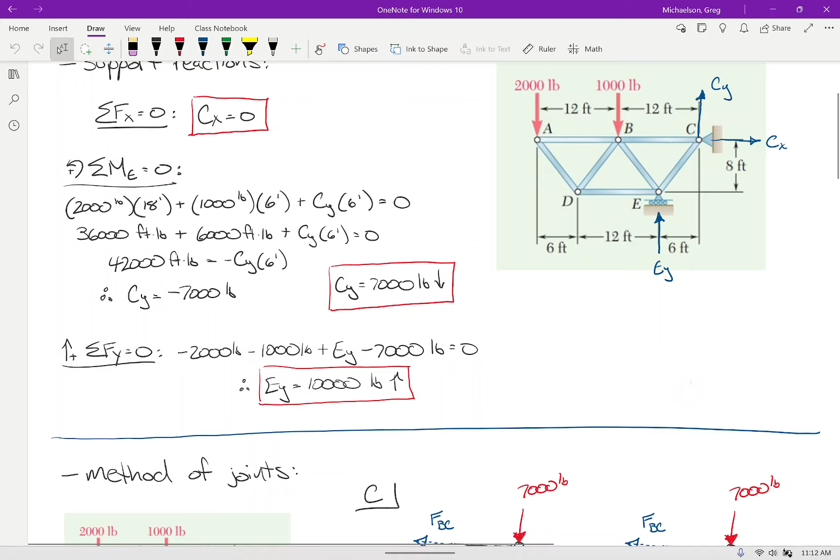Sorry. Oh, the CX is 0. Because if you look at the original structure, there are no forces going this way. The only forces are vertical, right?

So here's what I propose. There's an unknown here, an unknown here, and an unknown here, as there would be in any structure. But if I look at the known quantities, all I've got is vertical and vertical. So if you were to write the equation, just think about it: summing forces in the x direction and writing every force to the right as positive, the only force I have is that. So it's got to be 0. That's what I'm saying there. Does that make sense? Okay.

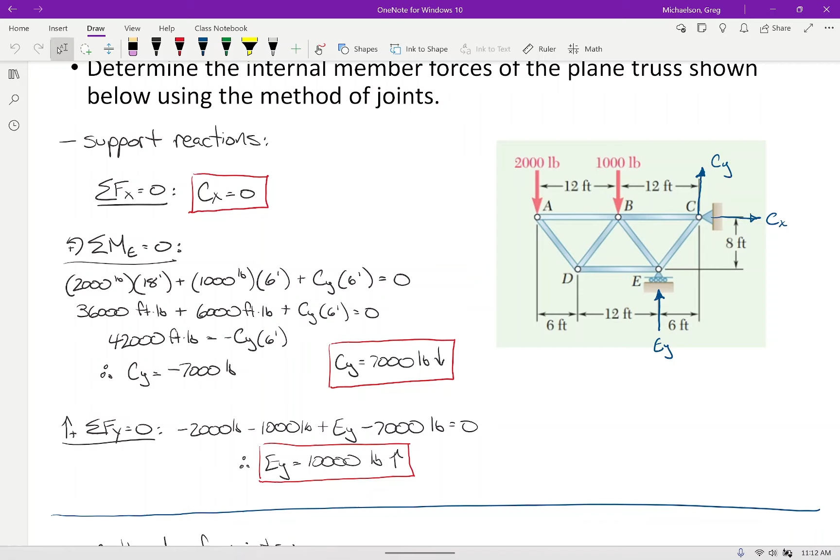All right, let's go through this joint analysis. Let's see if anybody has any question about the reactions. Okay, so let's go through this joint analysis.

Okay, so the first thing I want to ask is does everybody understand why I started this example with joint C? In other words, could I have started with joint E?

Okay, remember that whenever you do a joint analysis, you must start with a member that has no more than 2 unknowns. So if I start the problem at joint E, I have 3 unknowns, 1 unknown for every member. I can't start at E. I'm not saying I can't analyze E at some point, I just can't start with it.

So there are only 2 joints I can start with, C and what? A, right? Would you like to do A off to the side? Just because, we can just do A. Let's just do it on the fly just to make sure we're familiar with it.

Okay, so I'll do it here on the board. So here's how it works. So here's joint A. The first thing I'll do is I'll put the joint here and I'll put all the members framing into that joint. So there's only 2 members framing into joint A. Okay? So far so good?

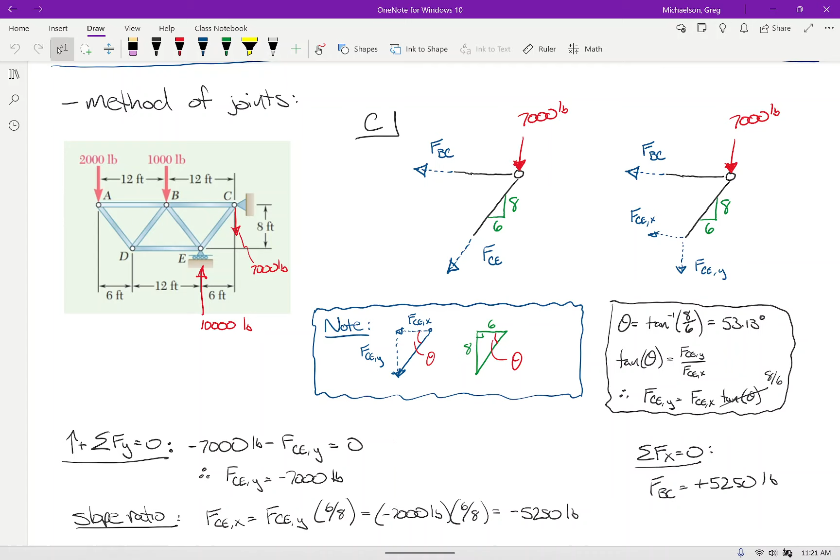Just do it for the rest of the structure, right? So I started here. I did joint C first, then I did joint A, and here's joint A, so I did it the same way here, right? Then I said, okay, if I look at joint D, it has 3 members framing into it, but I knew one of them going in. So then do joint D, then do joint E, and then the very last joint you ended up having to do, because if you follow all your forces, you already knew what they all were. Does that make sense?

So for AB, when you're finding it, so it's 1,500 pounds in tension? Yes. Okay, and so let me guess, is the question why did the arrow flip? Yeah. What's your question? Okay, I thought when they were facing each other, that's compression.

They are. What I'm saying is, here's the joint. The force is pulling away from the joint. If you're the joint and I'm pulling 1,500 pounds this way, that's tension. So the force is going away from A. These two forces are going towards A, so that's compression. So, but for AB, this is AB, right? Yeah. Yeah. Okay.

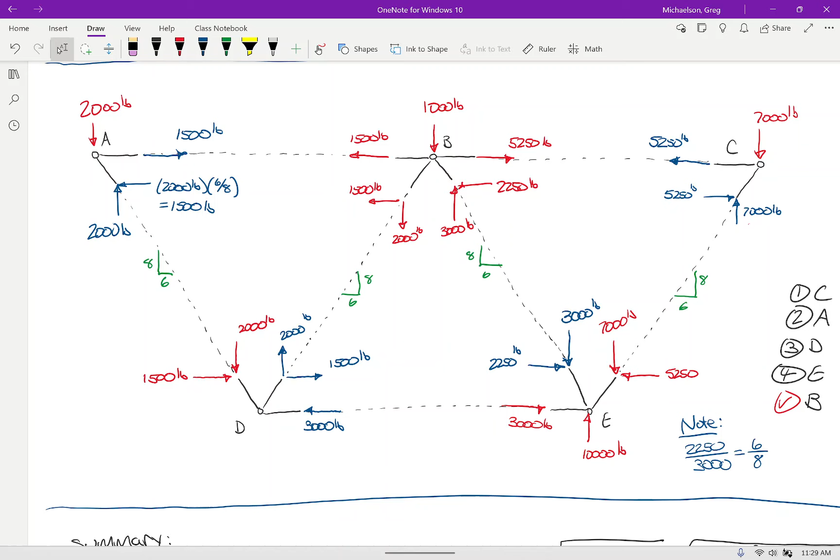I think just the most helpful thing is seeing the solution for the homework. I know we'll get it, but... All right, here's what I will do, this is the last thing I'll do. Because I've done a few, I will go on Teams and post a couple of the internal forces, not posting all of them. Oh yeah, it's okay, because you've got till Friday. I'm gonna open it up till Friday. So what I'll do is I might give you one reaction and two of these, so you'll have something to go off of. Is that fair? Well, I'm not doing any more.

Are we good? Okay, any questions on this? Any other questions on the homework? Because I do want to say a few words about sections. Going once, going twice. Okay.

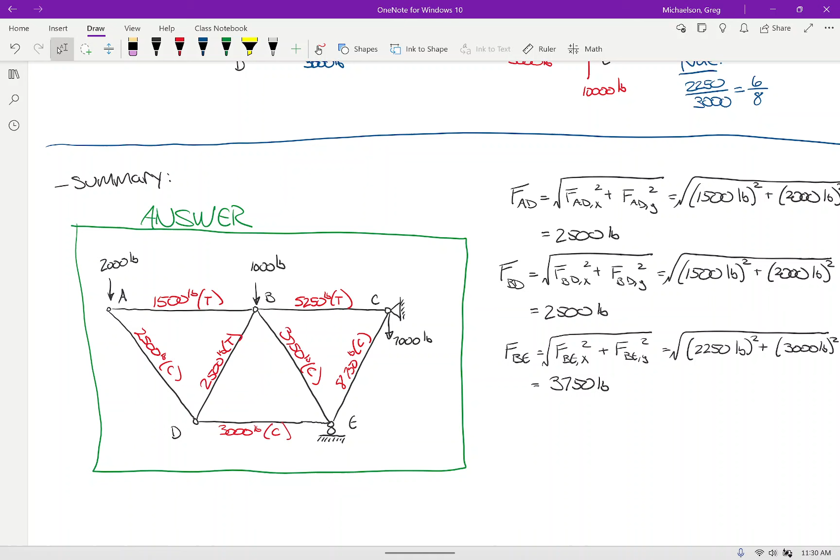All right, let me say a few words about sections. And again, we're going to treat this as a bonus assignment anyway. I want to say a few things about it. Let me go to my lecture notes here.

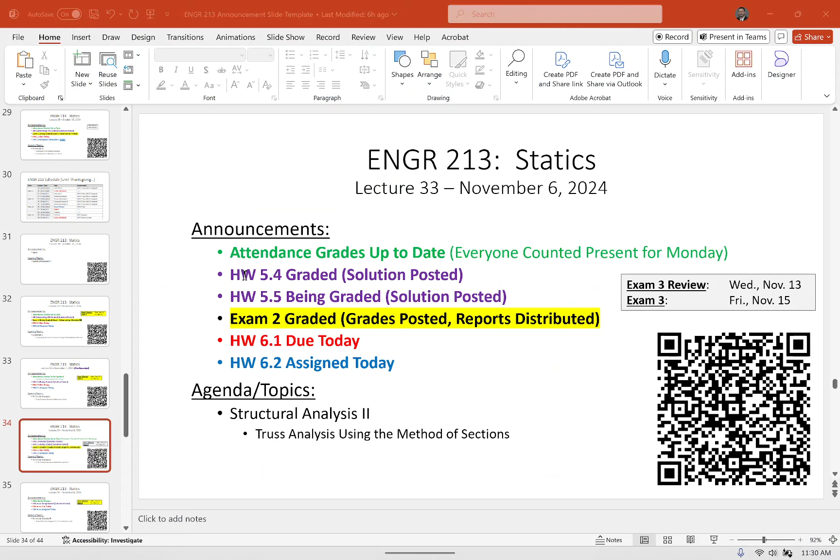Okay, so the thing about sections, about truss analysis using the method of sections, is—I mentioned this in the video, but I'll say it here again. When we're analyzing a truss, we analyze it such that ultimately what we're trying to get to, the three assumptions that we make, is that each member only carries one internal force. It's either tension or compression or it's zero, but it's only one value inside the member.

That's what these assumptions basically are distilling the analysis to. Now I told you there were two methods: the method of joints and the method of sections. I teach structural analysis, which for all intents and purposes, a lot of that class can be thought of as statics 2 in terms of what we cover.

So we do truss analysis again, and we go much more in depth. When I cover that topic, we primarily cover the method of joints. The reason why is because I don't know many structural engineers who are designing trusses, and I don't know anybody designing a truss that only wants the force in a couple members. Ultimately, they need the force in every member to select members. So the method of joints is really the more widely applicable one because you need every answer.

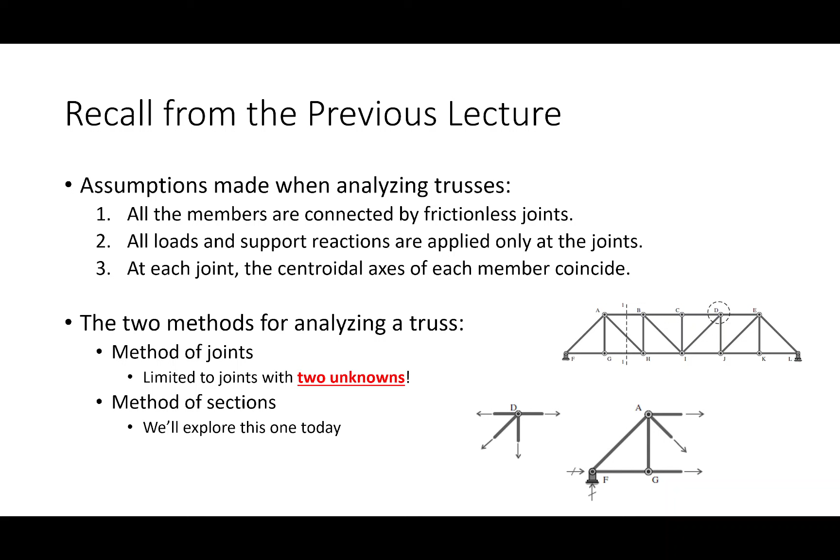The method of sections is really more of a spot check approach. Now, there is an added benefit with the method of sections that you don't get with the method of joints. When we do a joint analysis, we only have two equations of equilibrium, a sum of forces in the x direction and a sum of forces in the y direction. Why are we only limited to those two equations? Because all the forces are meeting at a common point. There's no moments, so we don't have that equation.

So one of the tedious aspects of a joint analysis is that we can only do joints with two unknowns at a time. If you got a really big truss with the method of joints, you're going to be there a while. It's just the truth. What if I gave you this problem and said, give me the force in member CD, and that's all I wanted? On method of joints, you can do it, but it'd take you a while. The method of sections will permit you to get that one force fast. So the method of sections is a spot check type approach.

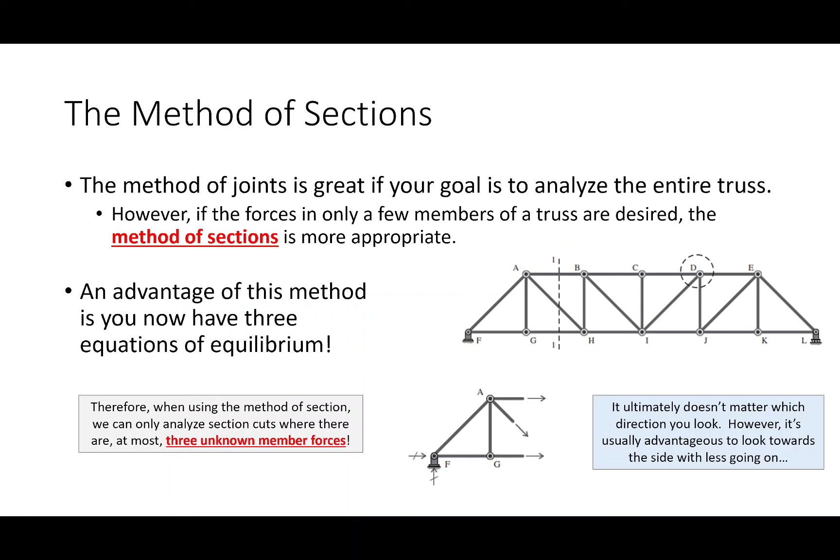I'm going to show you how the method of sections works real quick with this example. Given that we've spent some time revisiting the method of joints, what I'm going to do for this problem, so we can get some work done on the method of sections, is I am going to go ahead and just give you the reactions.

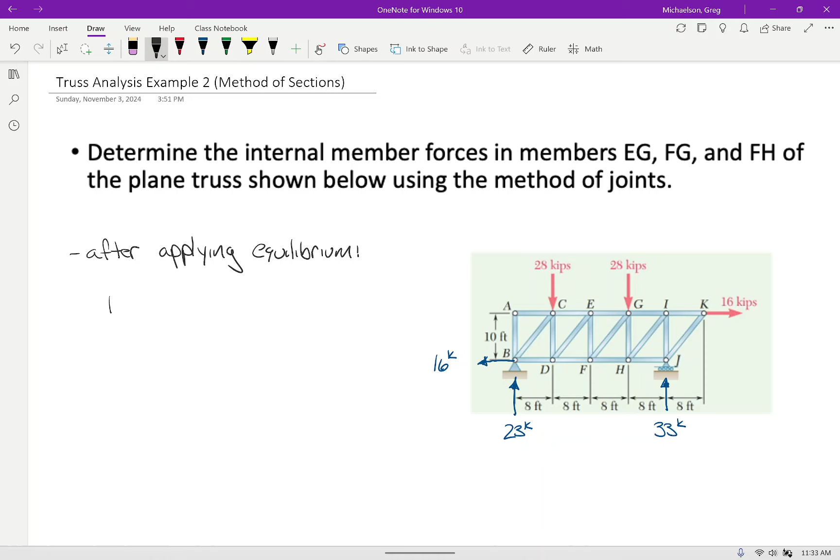Normally what we would do is sum moments at B and sum forces in the X direction and all that. Is it okay that I'm just giving you these for the purposes of this in-class example for the method of sections? Nothing about the computation of the support reactions differs here. For example, if I'm summing forces in the X direction, I have 16 to the right, I need 16 to the left, and then sum moments here, sum moments there, so on and so forth. Everybody with me so far?

Okay, now let's read the problem. The problem is saying that we need to determine the internal forces in the following members: EG, FG, and FH. I highlighted them here. Those are the three members that we need to analyze, and in order to do that, we're going to apply the method of sections.

So what is the method of sections? What we're going to be doing is breaking out the secret weapon of structural engineering, which is the samurai sword or lightsaber, if you happen to be a sci-fi fan. And we're going to slice this structure in half. Let me explain the methodology, the idea behind this.

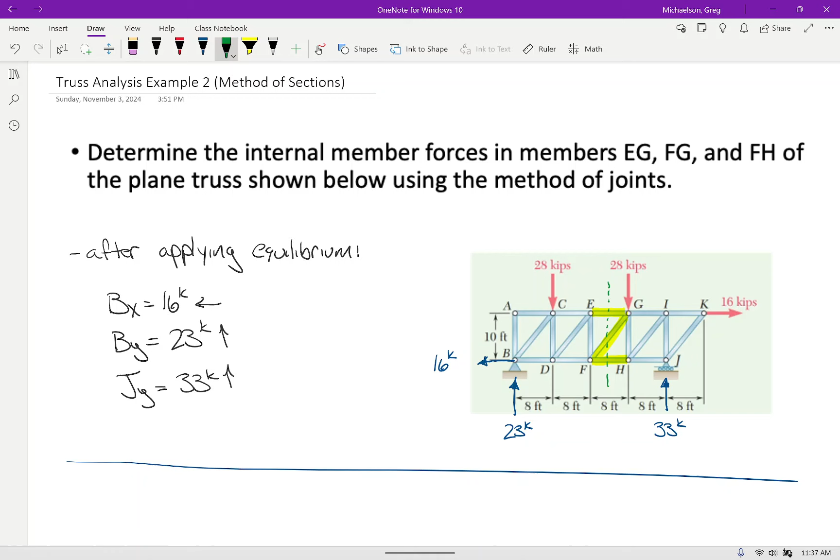And that just sounds like a really painful problem, and I wouldn't do that to you. So we're going to cut a section, and we're going to look left. When I say look left, what I mean is I'm going to cut the truss into 2 pieces, and I'm only looking at this part. I'm not looking at this part, so I'm going to look at this.

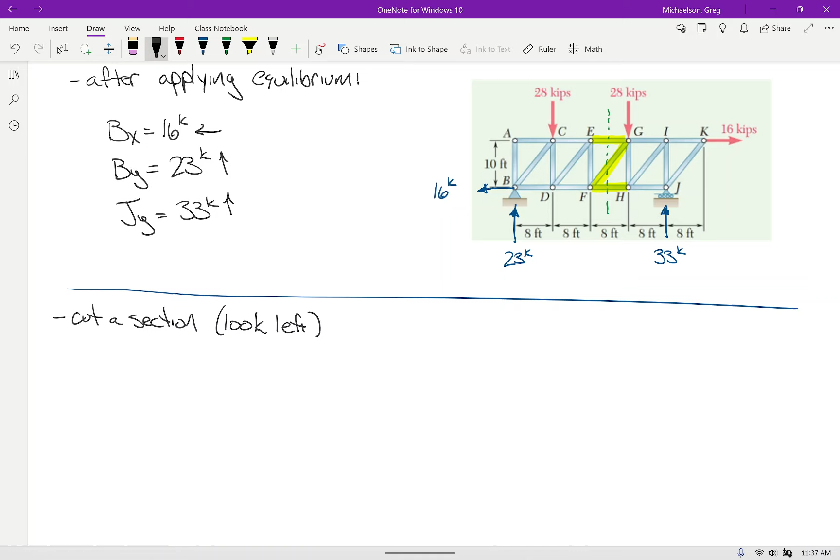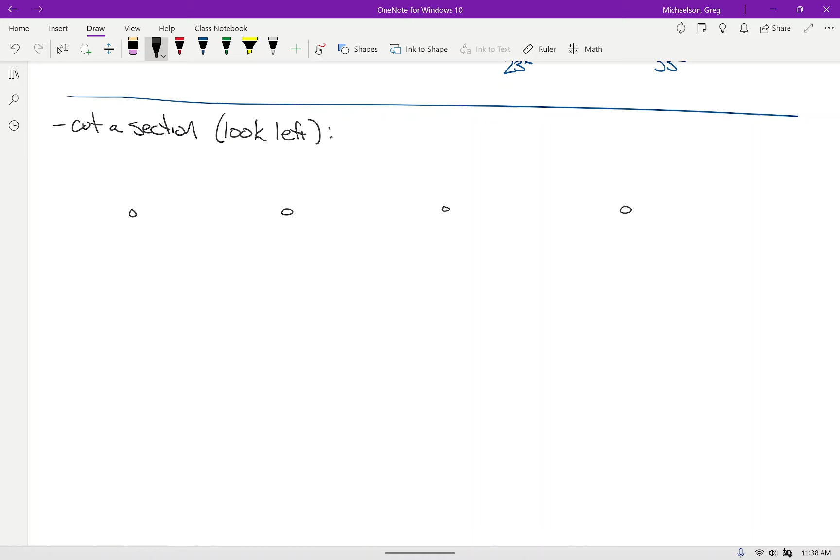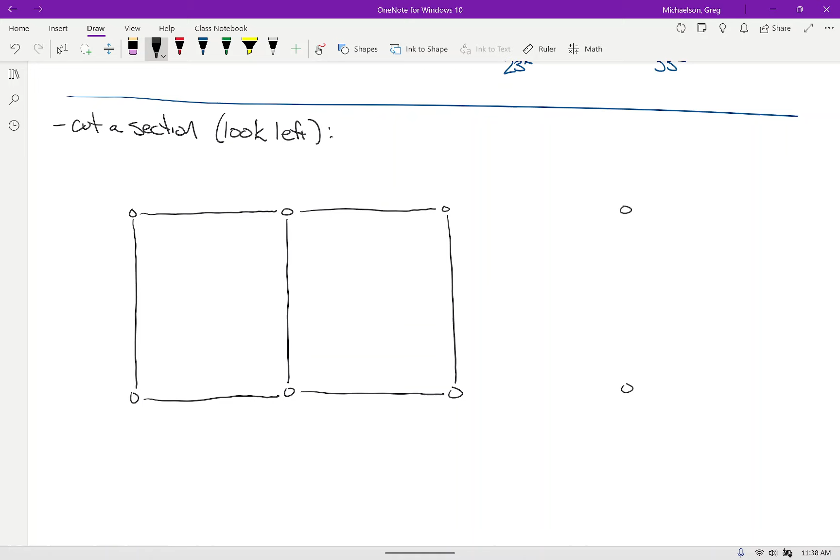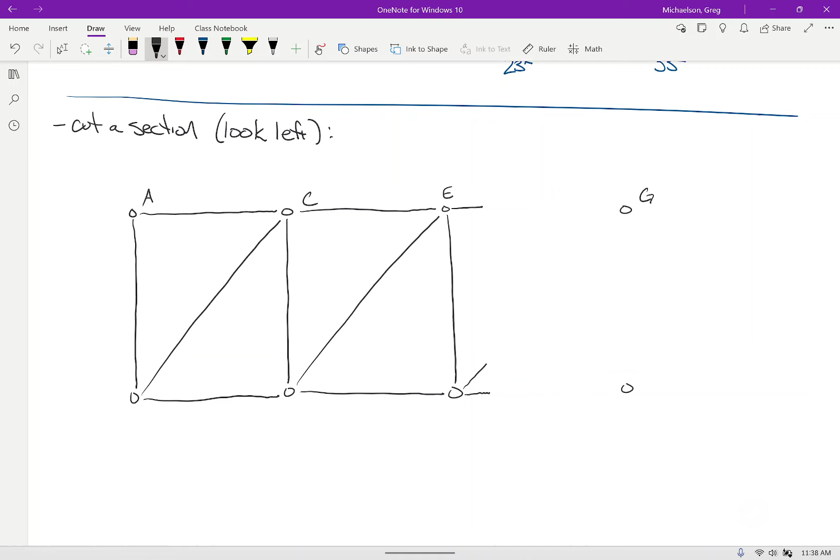So my apologies for the extra art, but I'm going to redraw this again, and I'm going to draw it kind of big. You'll see what I'm doing here in a second. So we'll call this joint A, call this joint C, call this joint E, and then B, D, F. And we'll put G right there, and we'll put an H right here.

So the other thing I'm going to do is draw the forces on the structure on this side that I know. So this is 28 kips. Maybe I'll lower this just a little bit. And then we have a force here, which is 23 kips. And then a force there, 16 kips. And just to make sure we don't forget our dimensions, this is 10 feet, and each of these are 8 feet.

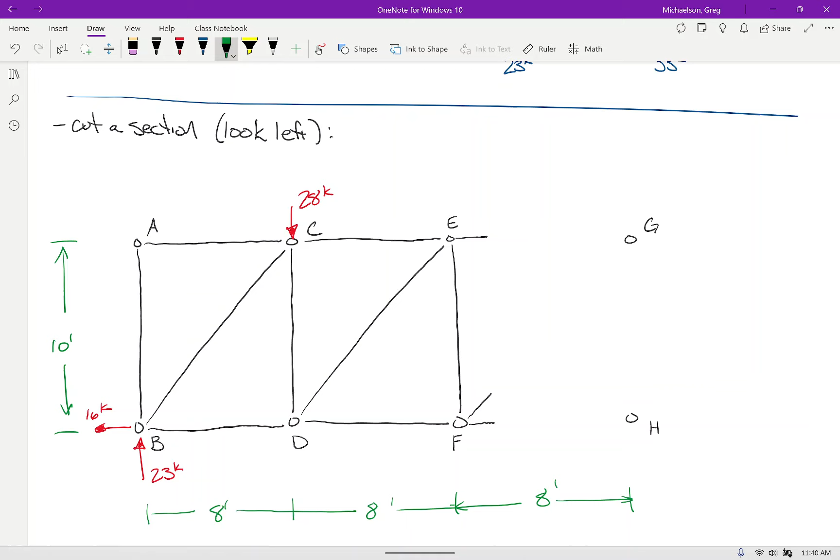And you'll see why I drew these over here in a minute. Everybody with me so far? So this would be what the structure would look like after we took the samurai sword or lightsaber to it. Is everybody with me on that? Now, again, if I'm sitting here on the truss and we cut the structure in half, the structure's going to fall down because it's not in equilibrium, right?

So, here's what I propose, and I'm going to do this just to sort of make the point. Again, the structure isn't out here, but let's just do that. I propose that there's an unknown force right here, we'll call it FEG. I propose there's an unknown force right here. And I propose that there's an unknown force in this diagonal member, right? I'm going to split it up into X and Y. But that's what the structure is going to look like.

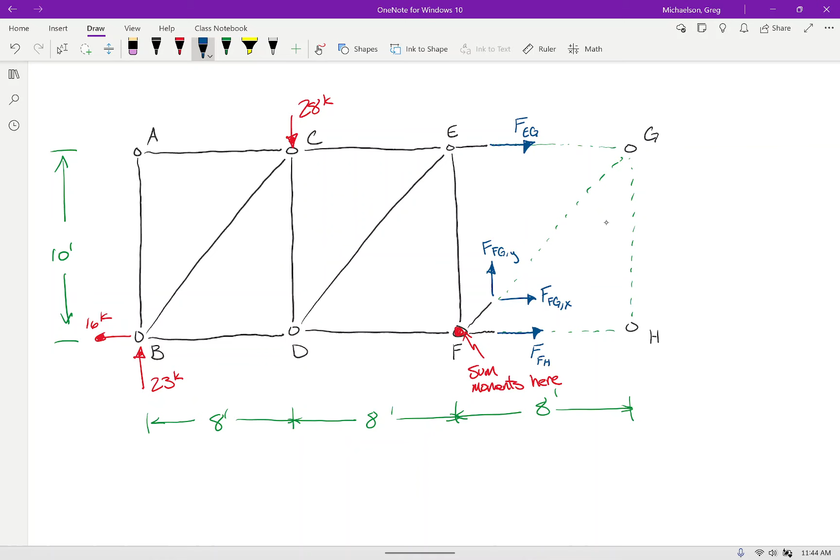I think that's the nicest moment symbol I've ever drawn. I'll never draw one that nice ever again.

Okay, so we are summing moments at F. We do it the same way we've done any problem. Does the 16 kips right here generate moment at F?

You're shaking your head no. Why? You're right, but I'm asking you to tell me why. The 16 kips, does that line of action pass through F? Yes. So if it passes through F, does it generate any moment at F? No, right? So do we have to deal with the 16 kips?

No. Does the 23 kips generate moment at F? Is it positive or negative? What's the moment arm from F? 16 feet, okay.

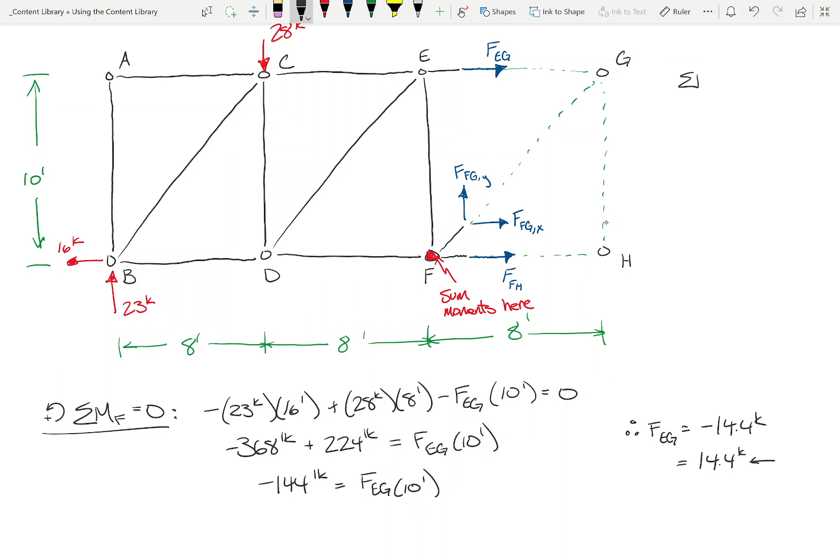Okay, so why don't we sum forces in the y direction? So what do I have? 23 kips minus 28 kips plus FFGY. So what's FFGY going to be? 5 kips?

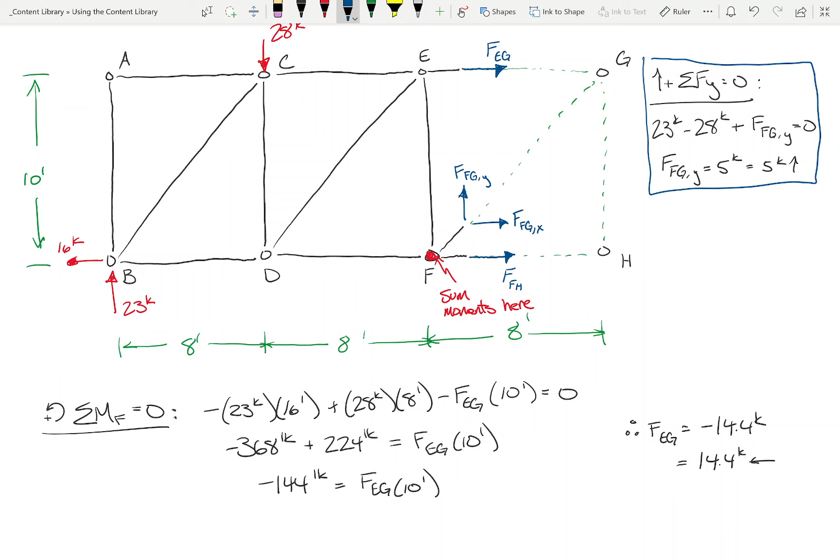Now what do I do? Help me out. What do I do? Using the slope ratio, right? So we'll say slope ratio.

That's going to be, all these members are 8 to 10. So that is to 8 as, right? So...

You see what I'm doing? Is everybody following me? I want to make sure this isn't too confusing. Everybody with me? In the back? Everybody over here? Everybody up here? So what would be left in this case?

Right, because, I mean, think what I have. Let's just start writing down what we know. This is negative 14.4. This is 5 kips. This is 4 kips. What am I left with?

I'm left with FFH, right? And how would I solve for it? In the x direction, right?